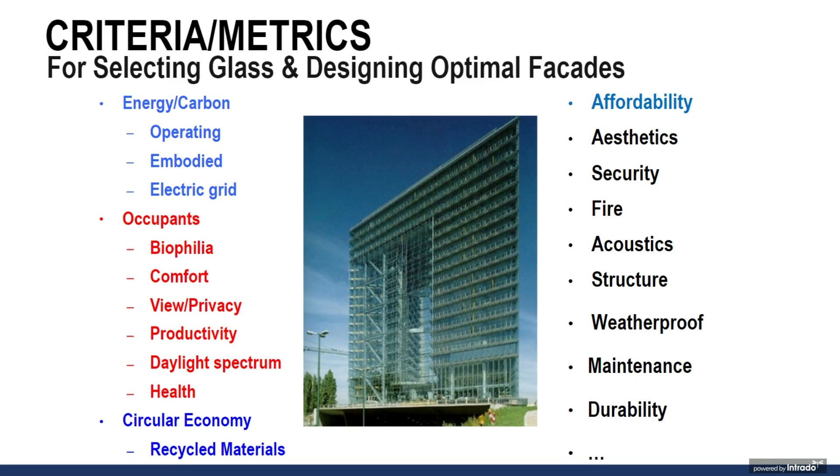Lisa's touched on many of the topics here listed in red, the occupant-centric aspects of glazing design. I'm going to reinforce that a bit with the ones in blue, looking at energy and carbon, both from an operating and embodied point of view, and then looking at the grid that supplies power for most of our buildings as well. There's a whole host of other issues shown on the right here, critically important in most buildings. They've got to be addressed, beyond the scope of what we can easily talk about here, though.

So if we talk about glass, sort of the underlying element here, glass is a transparent filter, and I want to emphasize the filter part and emphasize the fact that we want to be able to change the properties of glass, because the environment, both inside and outside the building, is changing all the time as well. So this is really about glass that allows you to manage view, but also manage daylight and solar gain.

This is a plot of about 5,000 different glazing products that are available on the market today. They're shown by their light transmission on the vertical axis and their solar heat gain on the horizontal axis. And the good news is that we have all these options. But if we look at the two green dots here: this morning when I woke up, it was cloudy and overcast in the Bay Area, and what I would have liked would have been glazing that had a dot on the upper right there.

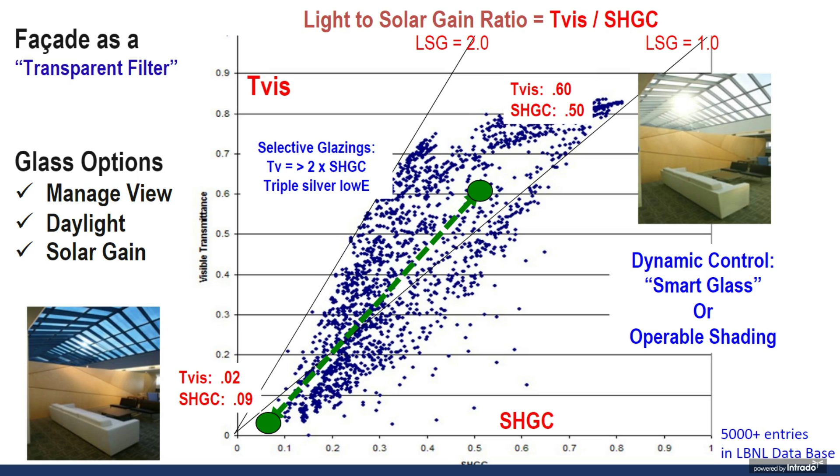High transmission, plenty of solar gain was good, but it's now bright, sunny, and probably going to get a bit warm this afternoon. So I'd like to change those properties and bring it down to the lower left. I can do that with emerging smart glass technology, but I can also do it with a host of operable shading systems that have been available for hundreds of years and are still being improved. So we want to be able to moderate and change the properties of the glazing system.

Now, we're not just dealing with glass, we're dealing with a whole ensemble. I'm just trying to show this in this sort of aspect of scale here. To the left, we can talk about things much thinner than glass coatings, and a lot of the glazings I showed you in the prior slide had coatings on them. Going to the right, we can add shading systems, framing systems, and we can even use the building design itself—the footprint, the floor plate—as a way of managing daylight, glare, and view through the building.

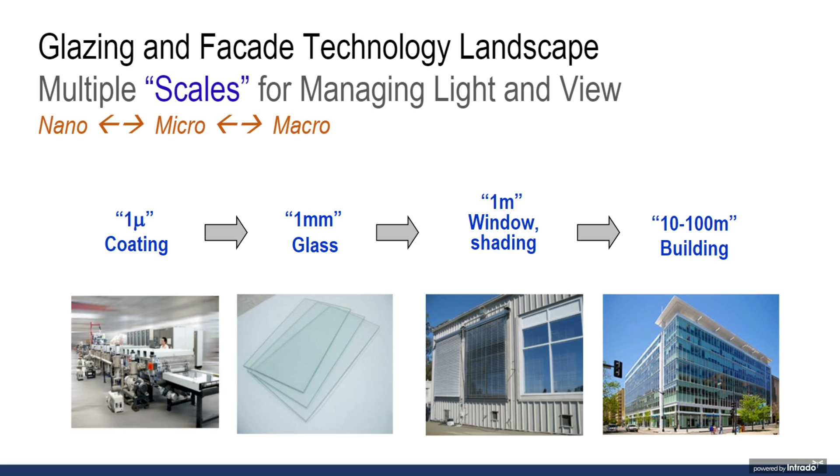If we dig in a little deeper, I've got on the left here, in the orange bullets, all the functional aspects that glazing is doing. Glazing isn't just a look through, it's got to be insulating to keep you warm and comfortable. We can manage airflow through the building. We can use glass as a heating element. We can use glass to make power these days, put PV on it. We can redirect daylight deeper into the space. There's a host of functional aspects that can and will and need to be done in addition to managing daylight and view.

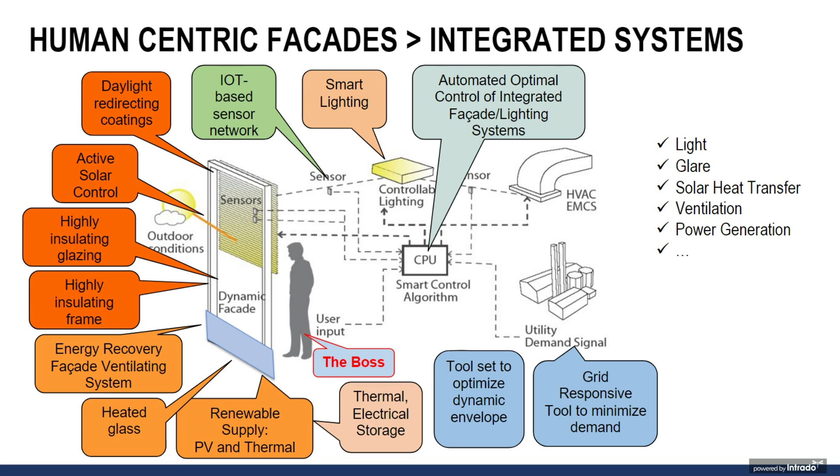And then, of course, this is just the facade. This is a piece of a much more complex building system, shown on the right there, in terms of lighting, HVAC, and the grid that sits behind it. And in the center of all this is the occupant, and sort of the crucial person or people that are going to be driving how all of these things are managed over time.

One of the key issues here is cost. There's all kinds of wonderful things that you'd like to put in a building, and many of them get value engineered out. We turn to cost-benefit analysis, to payback time, which is the blue box here. How much do I save each year? How much do I pay at the front end? How fast does it pay back?

I want to argue that if you're aggressive about the facade, in the green box on the left here, we ought to be able to do such a good job that we can reduce the heating and cooling system size, the chiller size on the right there, which has a cost benefit to it. And if we're going to put PV either on the building, near the building, or someplace else, that's a cost as well, and we can offset some of that cost.

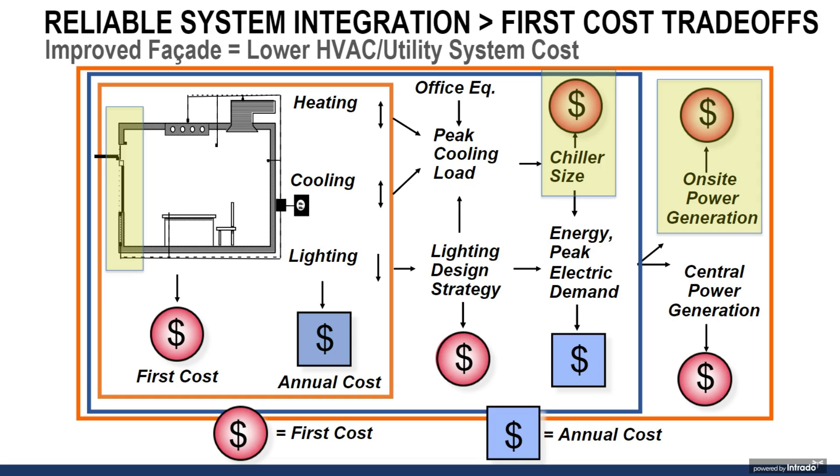So if we're aggressive in thinking about how the facade is going to operate, we think we can shift costs from other parts of the building back to the facade, so that value engineering exercise doesn't always end up taking functionality away from what we're trying to design and build.

The problem with what I just showed: if you go to your engineer and say you could reduce the chiller size because I've got this great facade system with shading and daylighting involved in it, she's going to say to you, how do I know it's going to work?

So now this slide, I'm looking at the operational side of the building. The building is now built, it's occupied. On the left-hand side are the drivers that, minute by minute, hour by hour, change what we're going to be doing. And then the question is, how do we manage that? Do we rely on sensors and controls? Do we rely on people? Do we rely on part of both? I think the answer is probably both, but exactly how we manage that is a real challenge.

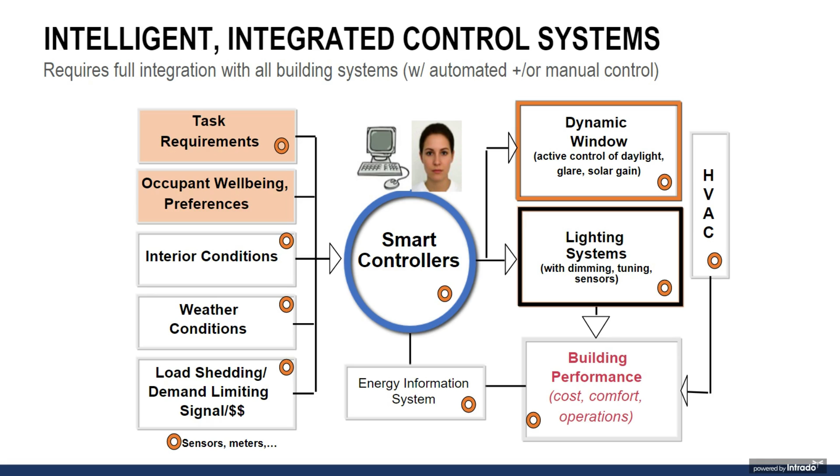I'm going to jump into what makes the challenge even worse: the fact that we've got an ecosystem here that is complicated, and I'll just subtly say non-optimal. You've got your design team, many of you on the call today. In the middle here, you're dealing with the glazing industry, the facade industry, the building industry in the upper portion, which is complex in and of itself. On the right-hand side, once the building's built and occupied, you've got to deal with the owners, with what occupants need and want over time, and the ongoing maintenance and renovation that happens in all buildings.

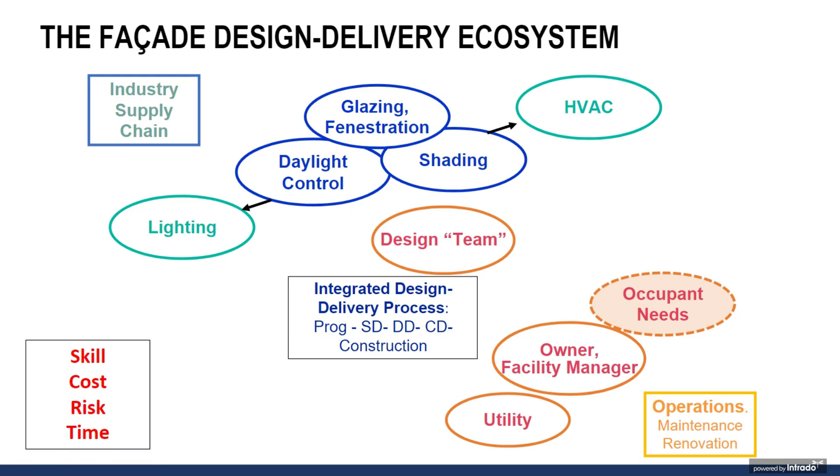And the criteria on the left here—skill, cost, risk, and time—infiltrate all of these different decisions. So this is a real challenge. To end on a more optimistic note, good designers can solve these problems, and do it.

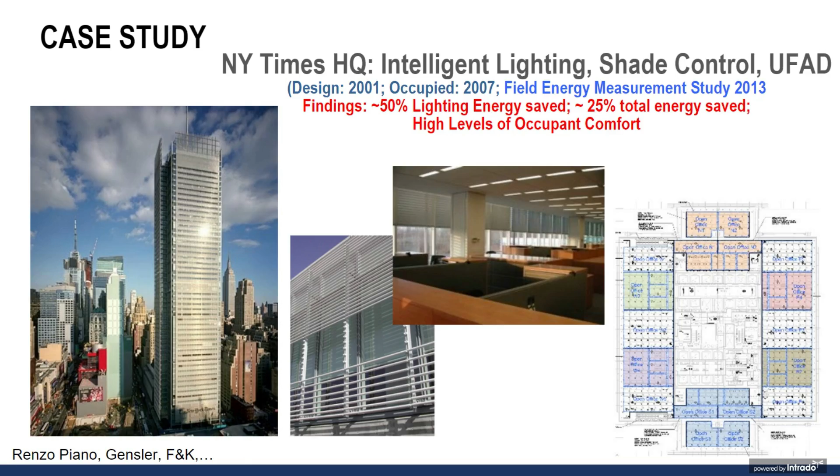That project was done with a custom mock-up for that one building. We're able now—this is a mock-up system at Berkeley Lab called FlexLab—where you can build a 600 square foot space. You can do the integration of the glazing, the shading, the daylight dimming, and make it work as a system. You can bring people in, study what their preferences are, how the building actually works. So we're beginning to work some of the bugs out of these systems and getting to the point where we can more reliably design and then implement these solutions.

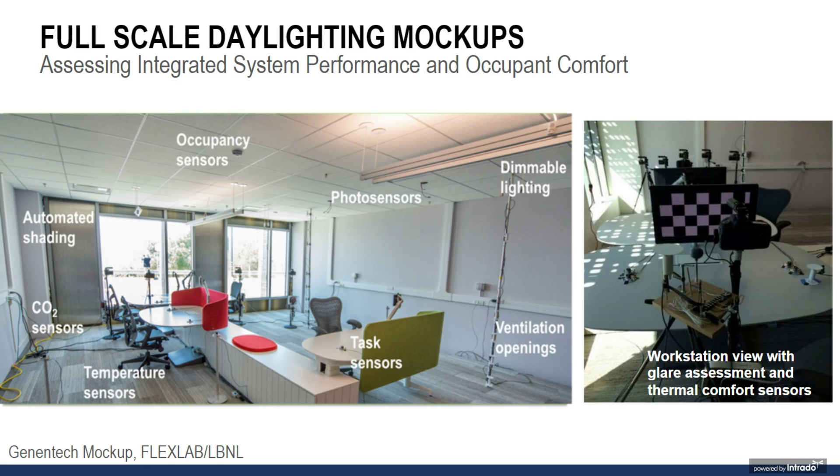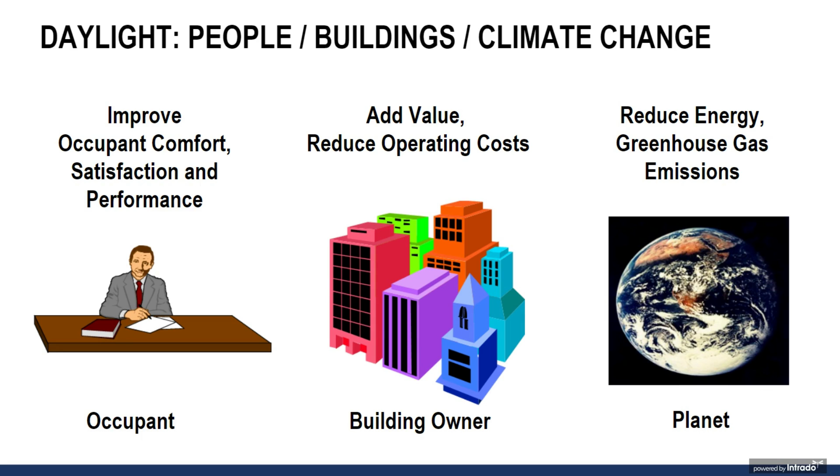So finally, I think there's a win-win-win here. We can do what we want for people—the view and daylight that Lisa started with. We can add value for building owners and operators over time, addressing the energy issue. And if we address the energy and carbon issues for every building, then cumulatively we'll be helping to solve the global greenhouse gas problem. The challenge here is to do this at scale. And in order to do it at scale, we need to get a lot of this stuff into codes and standards.

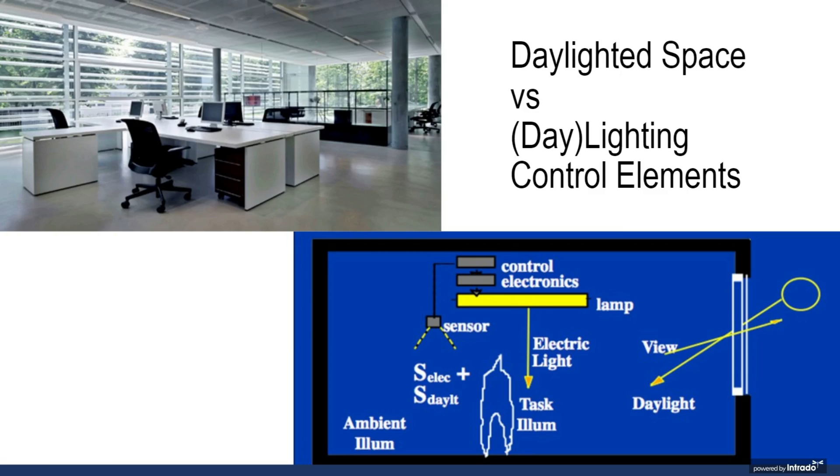So I'm going to pass this off to Tom Culp with two transitional slides here. One is showing the perspective of the occupant, in the upper left here. But in the end, this has to be reduced to an electrical engineering, a thermal engineering, physical design, where all the pieces and parts work and meet or exceed the requirements of code. This is an ongoing challenge where the properties of glass and windows become really critical.

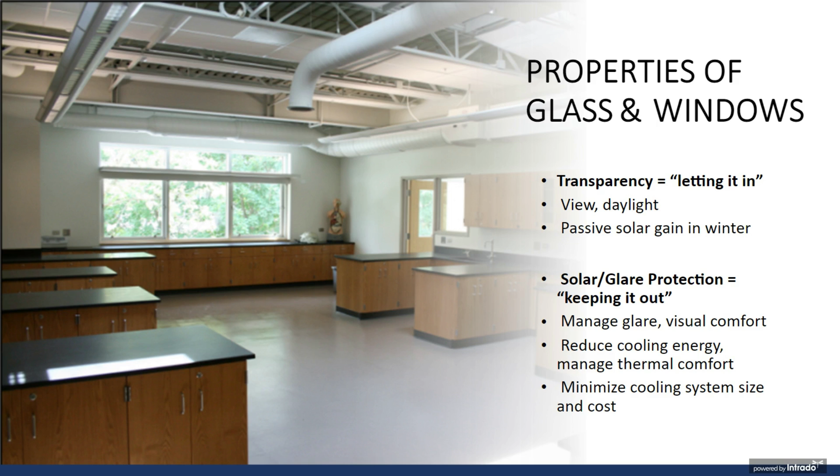Okay, thank you, Steve. And as Steve kind of hinted at, my work really focuses on building codes, specifically energy efficiency codes and green building codes and standards. How do we translate some of this good design into everything from a base code with minimum requirements, up to green building programs that are really trying to push the envelope on the high end. I'll touch on that today, focusing more on the views aspect versus energy efficiency—although we may in the discussion talk about how we can overlay and do both at once. One does not preclude the other.

As Lisa and Steve spoke about, especially Lisa, it's recognized there are numerous studies about how providing quality views improves occupant health and well-being, student learning, patient recovery, office productivity, things like that. So it's well recognized that it's an important part of a high-performance green building. How is that translated into green codes and programs? We'll also talk a little bit about the base code. So it is recognized—view is included in several green standards.

So the latest edition, just recently published, is the 2021 International Green Construction Code. This is part of the I-Code family. It's done in collaboration with ASHRAE 189.1, where ASHRAE writes the technical content, ICC writes the administrative content, and they promote it jointly together. But if you dive into there...

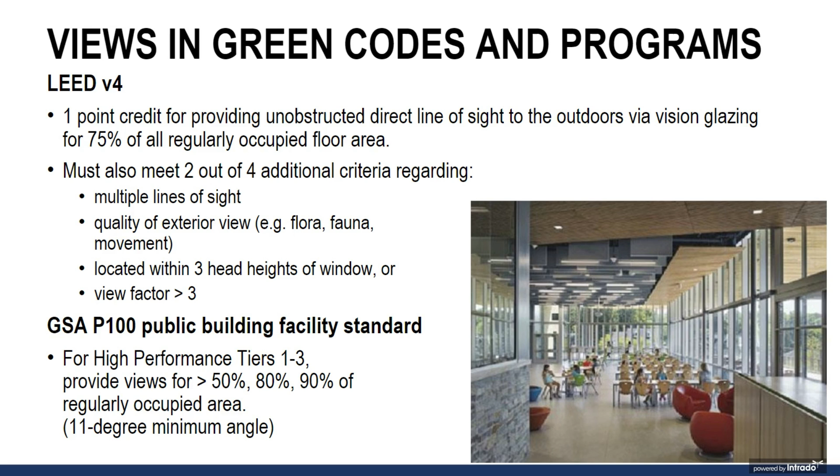So the next question I wanted to raise, maybe this can become a discussion point too, is what about the base codes? I spoke about green codes. We know LEED buildings, we know Green Construction Code, we know really the best buildings. But what about your everyday building? As Lisa's talked about, or at least I've heard her talk in other venues, is access to views, natural light, and quality indoor environments only for green buildings, or is it really a fundamental right for all? Why is it only for certain buildings? It really should be a fundamental right for all.

So that means we needed to get into the base code, in this case the International Building Code, IBC, which is widely adopted across the country. Instead of really stretching at the top, how can we set the floor and make sure we're doing the best even for minimally compliant buildings? Right now it's kind of disappointing.

When you look in the IBC, it does require all spaces to be provided with light, and that can be natural or artificial light. For the most part, buildings haven't been designed without artificial light since the 1800s, so this basically means you're going to have artificial light anyway, but that really means you don't have to provide natural light. They define that as a certain amount of glazed area, kind of like the views in the green code, but also looking out into a public way, yard, or court. So all that's good, but it's not actually required or guaranteed to provide natural light or views, even in the most critical spaces like schools.

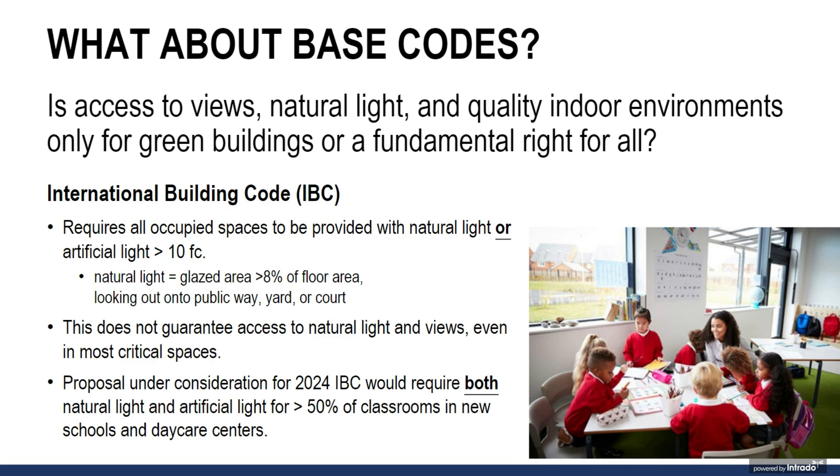Now that we've heard how important views and daylighting and our connection to the outside influence our minds, bodies, and overall health, how can a designer or architect balance what we understand qualitatively compared to the quantitative requirements in the codes? Tom, you touched on that a little, but how do we push that envelope? Forget about the energy aspects—how can we incorporate something like biophilic design into the codes?

Tom, you might be muted. Nope, my apologies. Yeah, it's a complicated process—there's politics, there's negotiation, there's code writing. It's a little different, like you said. It's a nice to have. We all understand the value, but how do you put that in the code?

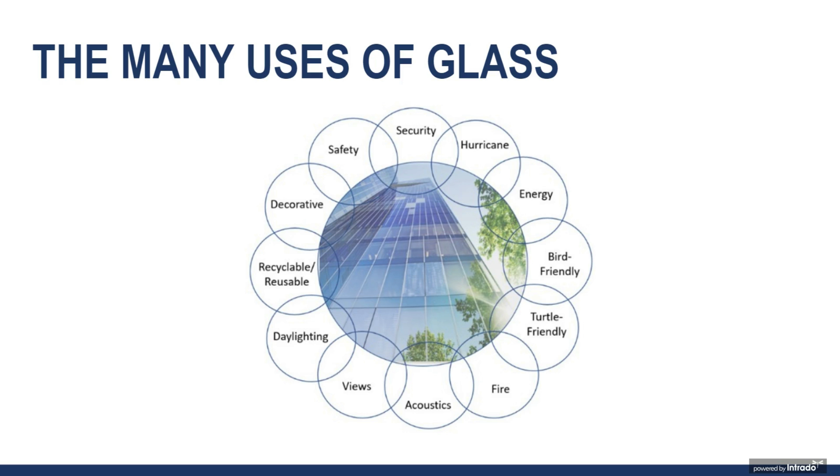Well, can I jump in here, Irmela? Of course, yes, go ahead.

I'd like to emphasize that our building codes are the legal minimum standard of performance for a building, and we'd like to expect architects are bringing a lot more to the table than simply meeting minimum legal standards—because architects inherently integrate across all aspects of the needs for buildings, those long lists Steve put up on one of his early slides. Bringing that all together produces a result where 1 + 1 doesn't equal 2, it equals 5 or 10 or 100, because you're achieving a win-win integrated design. Architects are really the key players with the skills to understand all these components and bring them together into a synthesis that's more than the sum of the parts. Providing beautiful daylighting inside buildings and beautiful views from outside is one of the greatest gifts architects can provide to their clients and all future inhabitants of their buildings.

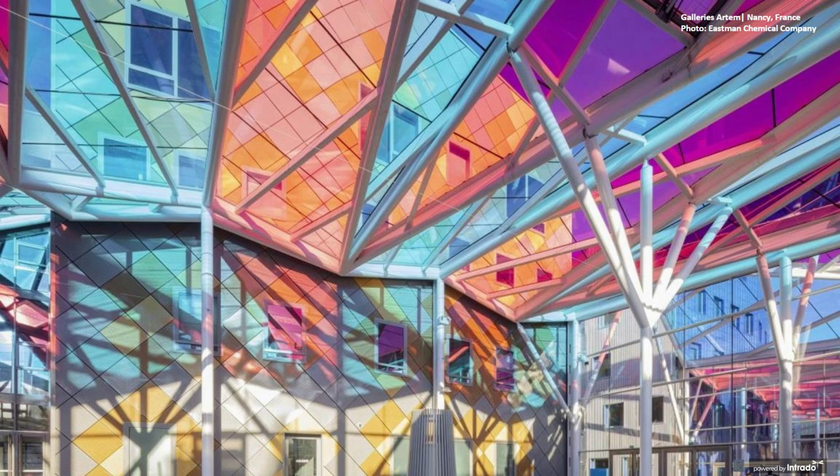Well, just, I think with the response to COVID, there's been a lot of thinking or rethinking about indoors and outdoors. I mean, the ventilation piece was the driver initially, but I think it's just opened up the kinds of issues and questions that Lisa just highlighted. So I think it's been interesting to see all of a sudden all kinds of pop-up restaurants appearing outside, not generally glazed, just open. But I do think that there's a challenge in all these, that with view comes the potential for glare and the potential for overheating. With these other aspects, with the ventilation aspect, if you've got poor air quality and noise outside, you want to be careful about managing that. So it's still a systems problem, it's still an integration problem, and it's still a challenge that needs the smarts of an architect and a design team to sort them through and come up with a solution that delivers, well, back to Lisa's point, that 1 + 1 = 3 and not 1.5.

She said 5, I'm saying 3, but that's okay. Yeah, I'd like to be optimistic.

If a plant won't grow where you're living or working, there might be something wrong with the air quality or the lighting quality in that space. That's a good point, and there's also a design issue here—you've got to pick the right plant. I've seen lots of indoor spaces with monstrous electric lighting systems because there was no daylight, no skylights, and they picked plants that needed a lot of light. So one needs to factor those kinds of issues in as well.

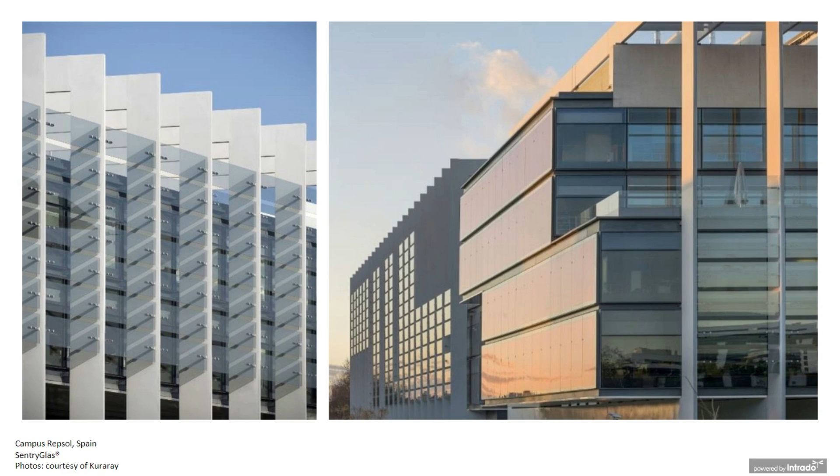And you can do that in modular ways—you can have a central glazing element that's constant throughout and provides the minimal view, and then larger or smaller other technologies added as a function of orientation. So I would argue that we should be adapting solutions to climate and orientation on each building. And that also gets into the footprint of the building as well. The slides we're showing now touch on that a tiny bit.

Yeah, and the shading we flashed through there was several options for external shading, whether it's sunshades or grills or automated louvers, things like that. And those can be orientation dependent as well, obviously west versus north. There's a climate piece too—it tends to stay away from larger windows in northern climates. But the technology exists today to make windows almost as insulating as walls. So if you need the view and want it, if you spend a little bit more on high performance glazing, you can provide thermal comfort as well.

I would add that while orientation is essential, the sun moves, so we need to pay attention to sun shading. Views also change by orientation, whether you're looking into a sunlit environment, as you would looking north in the northern hemisphere, or into a shadowed, silhouetted environment because everything is heavily shadowed from direct sunlight. That changes during the day, and reflections outside change during the day too. So providing occupants the ability to control and modulate the quantity of light coming through windows and the intensity of the view is really important to success.

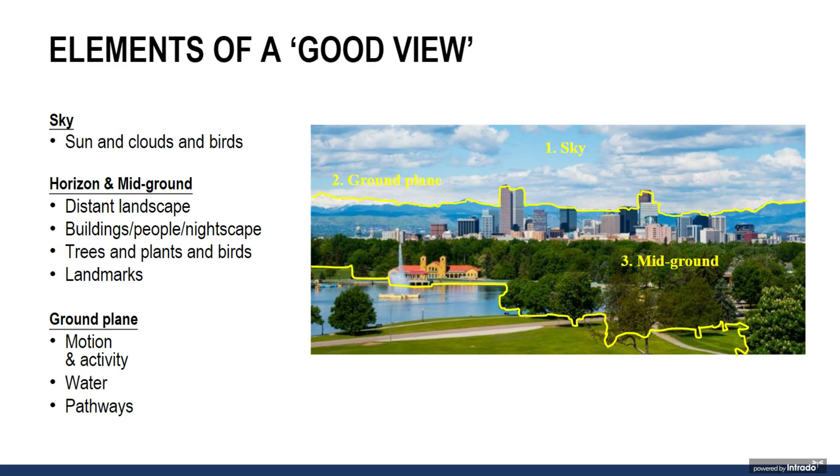I'm afraid we're out of time. I'd like to thank Steve, Lisa, Irmela, and Tom for a really great presentation, based on the questions we've gotten in. Just a quick observation on how long these issues have been around—at least 100 years, because in 1922 a documentary called Nanook of the North showed Nanook building an igloo out of snow, but at the very end he put in a piece of ice as a window and daylight access point. So these issues have been going on for a long time.